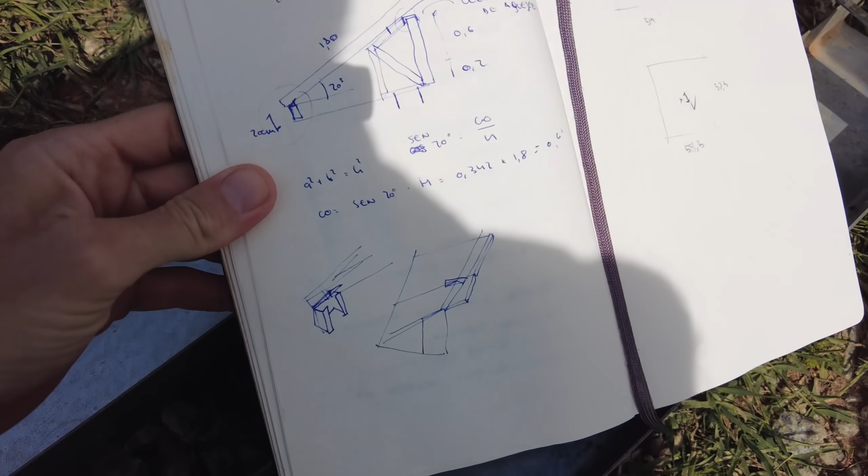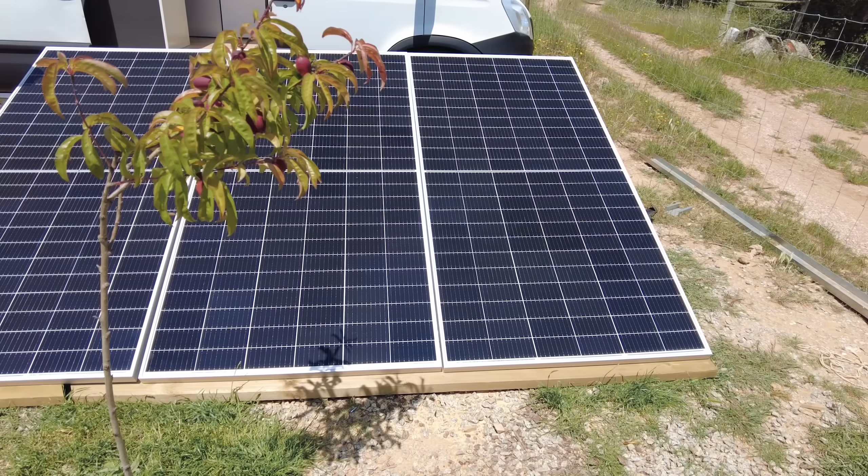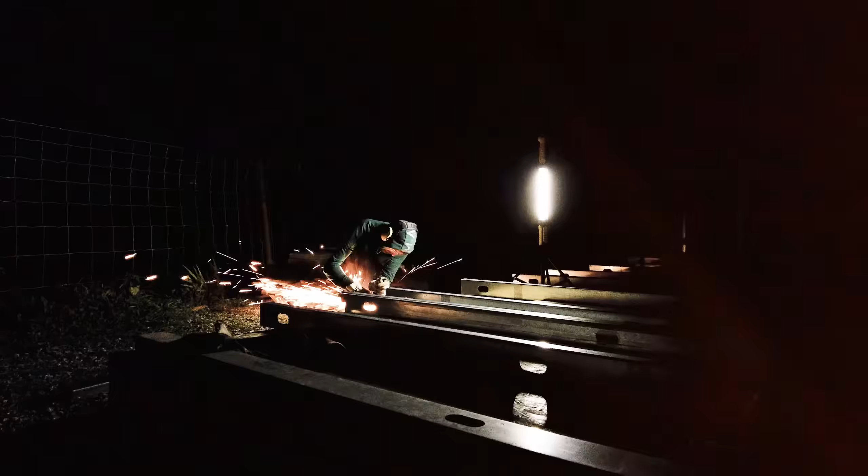I'm Eugenia, and this is Pepe, Aspen, and Lolita. We are an architect and a designer that moved to the countryside to self-build our new home. After traveling for a year in our self-converted camper van, we decided to settle in, looking to live a simpler life, grow our own organic food, and build our house.

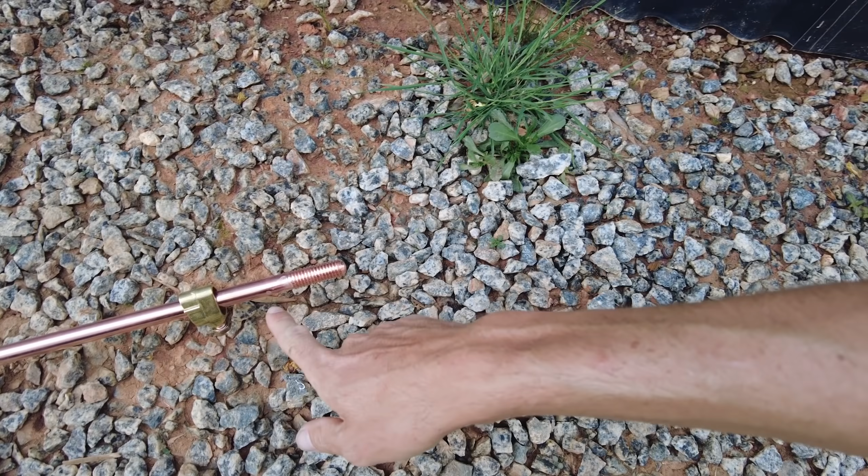I think I'm gonna go over this section. I'm gonna pick this area here in this corner and make a hole. I'm gonna go for the hammer, a shovel to take some of the gravel off, and that's it.

One of the sides actually has a pointy finish, and that's the one you're supposed to put first. It's gonna be complicated, I think, because it's supposed to have a machine to do it, so we're just gonna hammer it. I've seen many people doing it like that on YouTube, and it doesn't look like it's impossible.

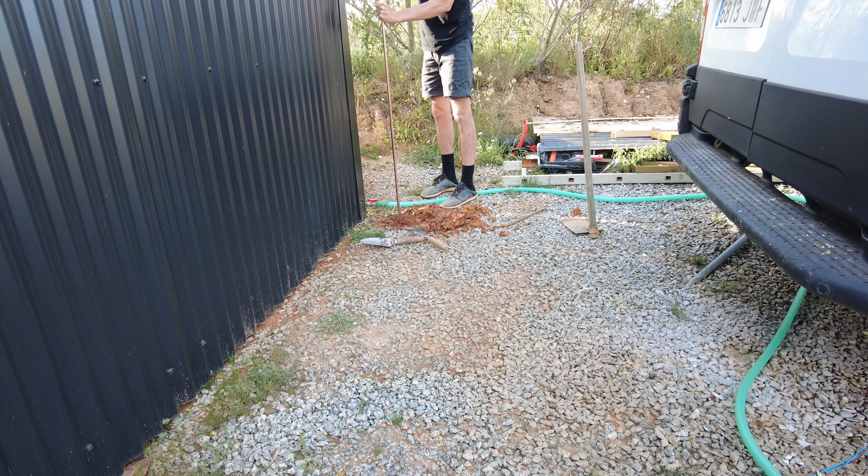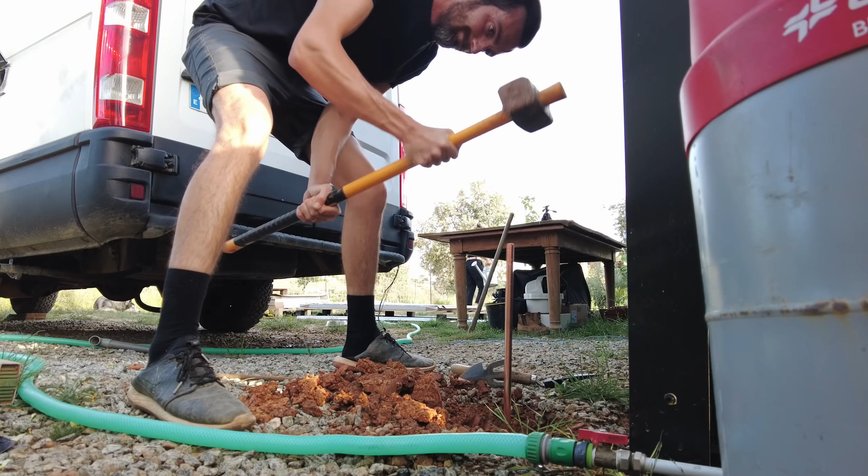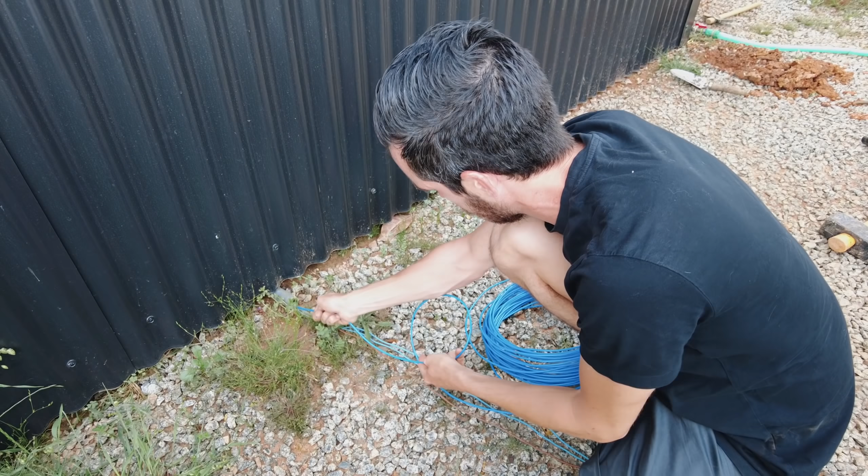So here it is, finally in. Took a bit more brute force than I expected. Here is missing a box that we will put later on because I couldn't find it. I just pulled these temporary cables a little bit in, attached the one that we want to take out, the ground one, to this cable, and hopefully now if I pull it, the whole thing will come off.

Check there. The solar kit installation was a bit complex, but luckily the kit that we got came with some plans that Pepe was able to study and go through before starting all the installation. He also has experience from when we built the van. This installation, of course, was at a bigger scale. Although at the end of the day he said that it wasn't much different. You just needed to know the basic concepts and it was pretty straightforward.

The electrical cable will come over here and inside the house through this little pipe that we need to close, of course, once everything is finished, because these cables are temporary.

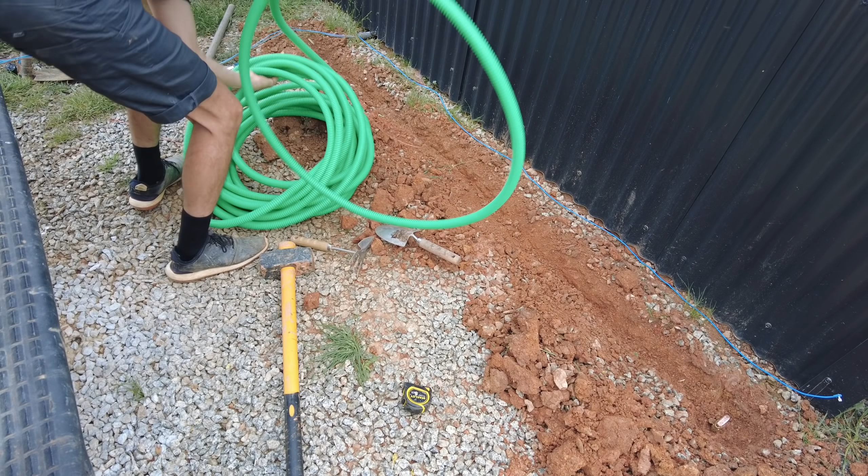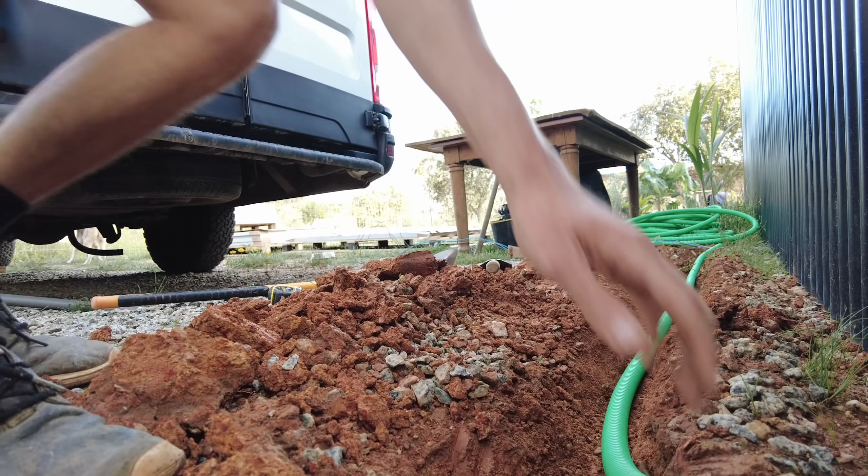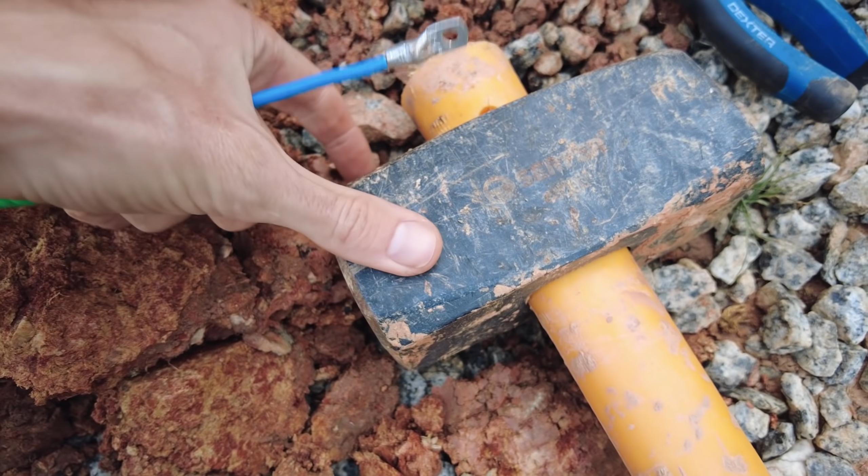There is a tool to put these terminals on properly, but I don't have it. I ordered it and it didn't arrive yet. So what I have done in the van, I just put a hammer or a piece of rock or concrete or something solid at the bottom, and then I just hammer it.

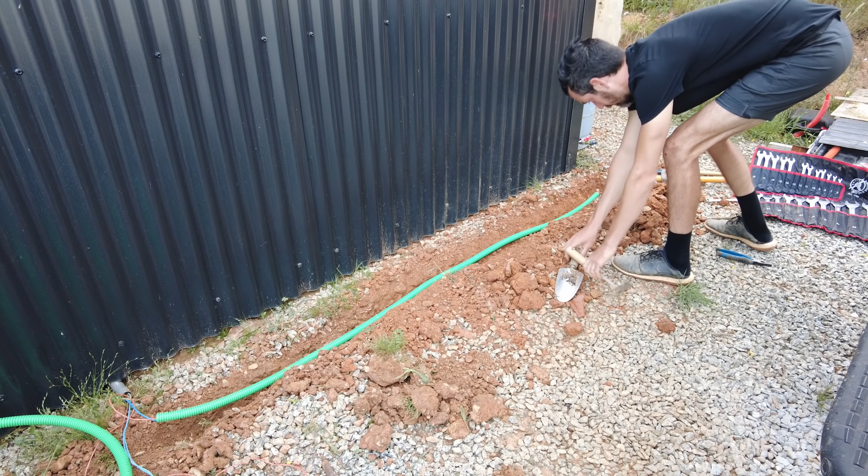We decided to go off-grid for many reasons, but the main one was to avoid being attached to monthly bills. At some point, when we were renting places, we had to pay bills of 200 euros per month and experienced increases in prices even though we still consumed the same. So after detaching ourselves from all of that while living in the camper van, we didn't want to go back to the same situation.

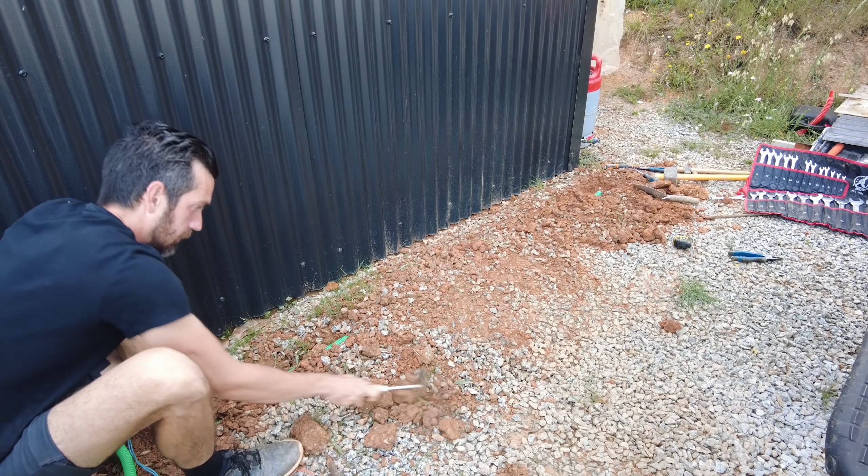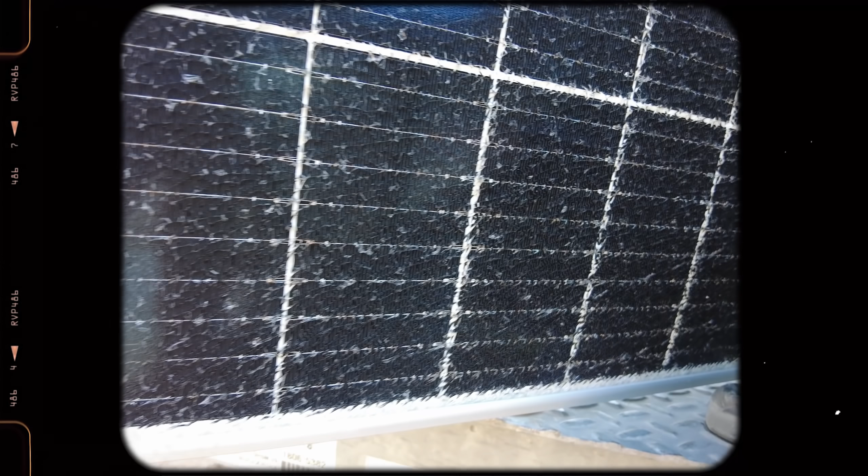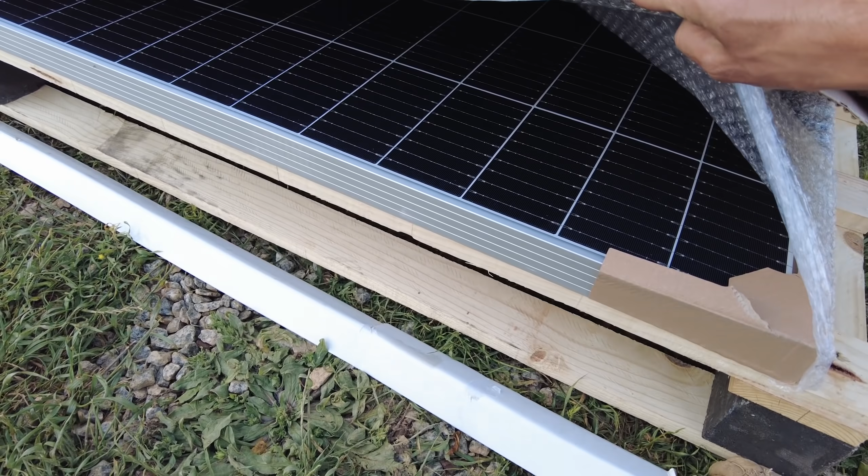We were missing one of the solar panels, and you may remember from last week's episode that one of them arrived broken, but luckily that same day we also got the replacement. By the way, we received the fifth solar panel in a couple of days only. The company just shipped this replacement to us, of course at no cost because it was a shipping issue. And tomorrow I'm gonna be starting the temporary structure for the panels.

Lolita loves a box, so we have left this box here for her for a while.

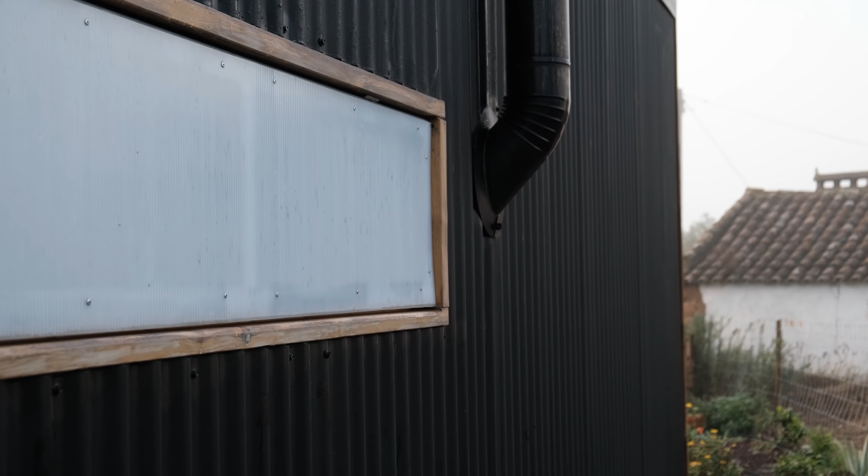At this point, we found ourselves in conflict because the original idea was to build a greenhouse that would hold the solar panels on top, giving us the extra space that we needed for storage, the laundry room, and also the option to grow our food during the winter. But we could no longer live without electricity, so we decided to install the solar panels on the ground.

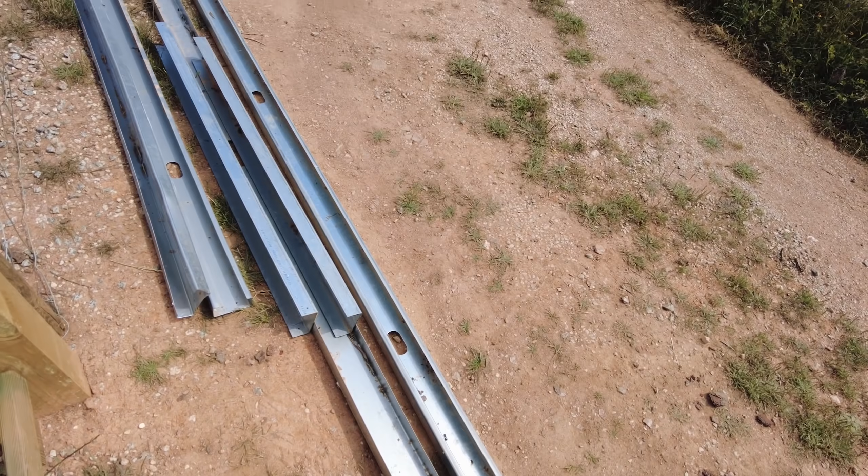Good morning, guys. Today is finally the day that we start installing the solar panels. Hopefully I can have it done by today. Not sure if I'm gonna be able to, but I'm gonna try. So our 5 panels of 410 watts each. For now we're gonna be building a temporary structure just to have the panels sitting here off the floor and tilted 20 degrees. We actually have some leftover material from the build. This is all the steel that was left. Not much steel, but it's gonna be enough to build this temporary structure.

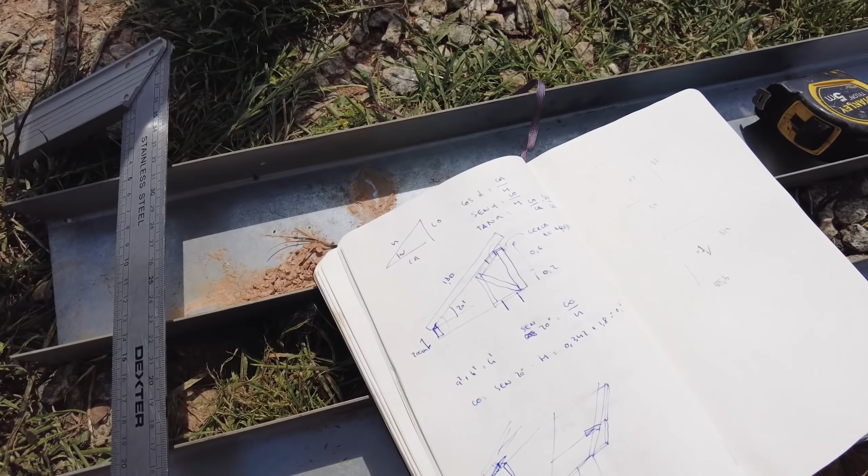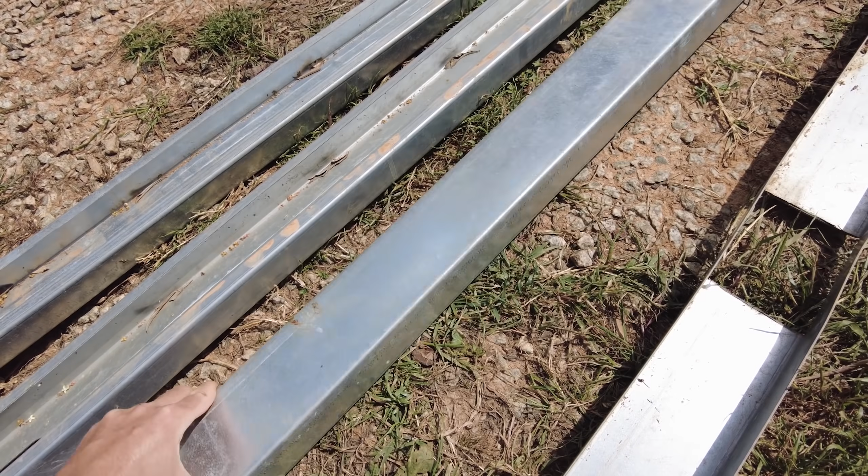What we plan on doing is basically 2 side walls. I don't know if I'm gonna do a middle one, but for now with the material that we have, I think we're gonna be able to do 2 side walls like this. They're gonna be tilted 20 degrees, probably like 80 centimeters tall in this position. They're gonna be connected with a long joist, which is this one. The joist is gonna be tilted like this 20 degrees, and the top part of the panels are gonna be screwed to this beam, raising the panel from the floor 20 centimeters.

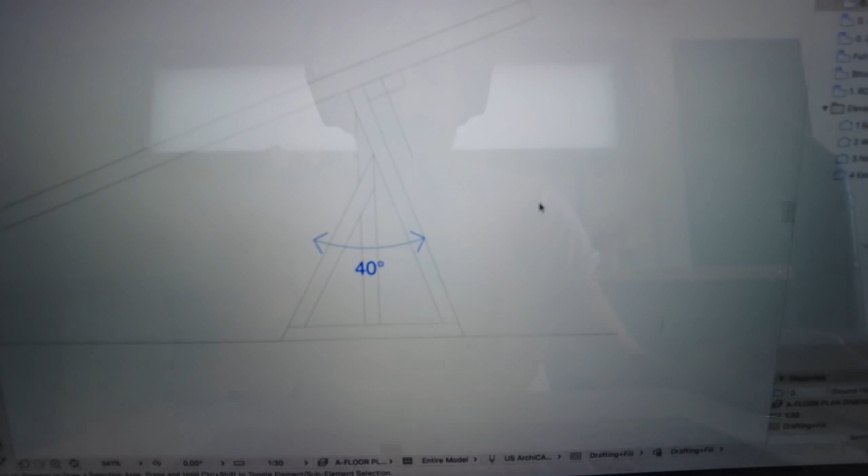Alright, change of plans. No way I can figure this out with the material that we have in order to make it stable. So I'm gonna just design it in the computer and then do whatever dimensions the computer says. Alright, so we already have what we're doing. It's basically a structure like this, like a triangle shape that will be sticking out like this. Then the beam is going to be attached to this structure on this side.

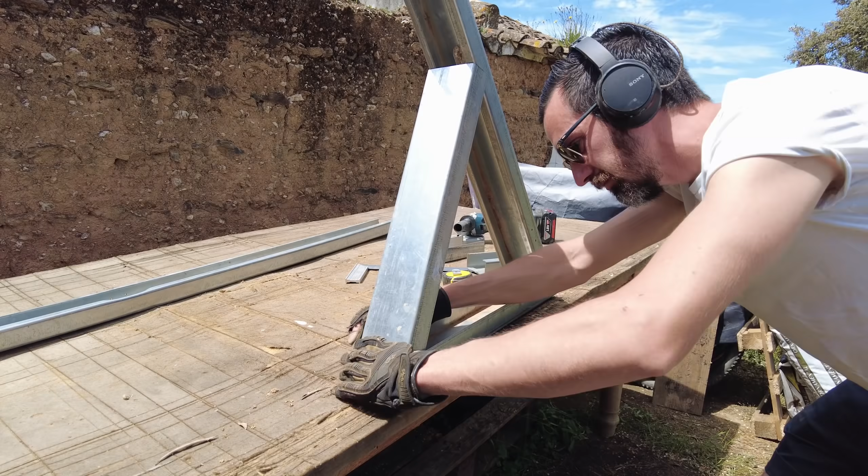So at this point, we are uncertain if we are going to build the greenhouse or not. There are many pros and cons, and the main con is that we really want to start the construction of the next house. If we build the greenhouse, it will delay all of that for at least a couple of months.

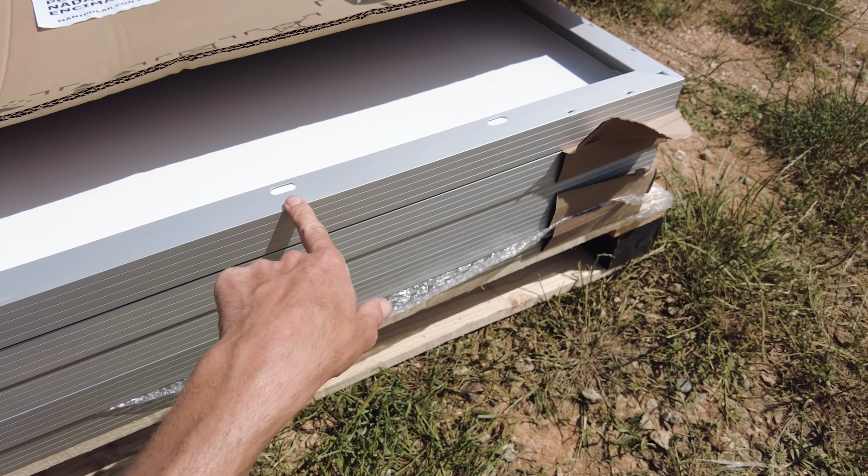The beam is gonna be sitting, I'm not too sure if over here or over there, we'll see, but for now let's say it's gonna be over here with these holes. And we already bought the bolts and the nuts and the washers for this. We bought them yesterday, they're here.

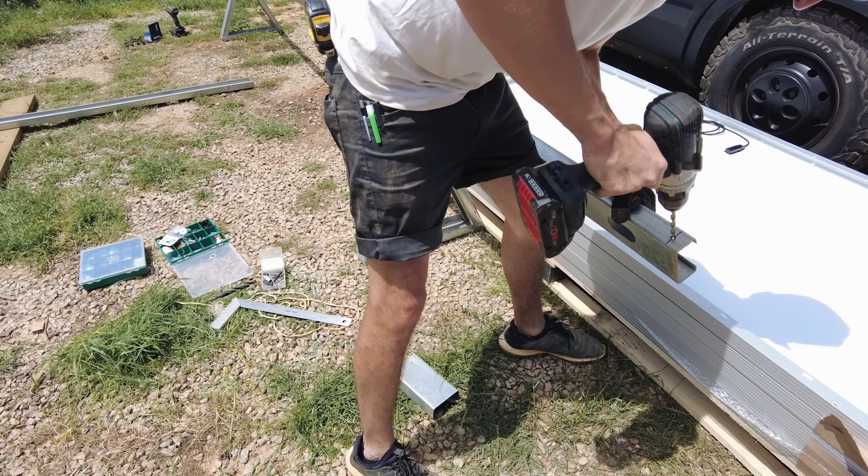Temporarily, we installed the solar panels facing directly to the south with an inclination of 25 degrees, knowing that we will increase that inclination in the final structure for the winter time. We're gonna put the first one just to test the system out. Hopefully it works.

Being honest with you guys, when we first moved to the property, we decided that we wanted to build in this part of the land everything that we needed to live comfortably for the next years. The warehouse will of course help us in many ways because it will make our lives easier, like having a laundry room, for example, and extra storage during the winter time and summer, etc.

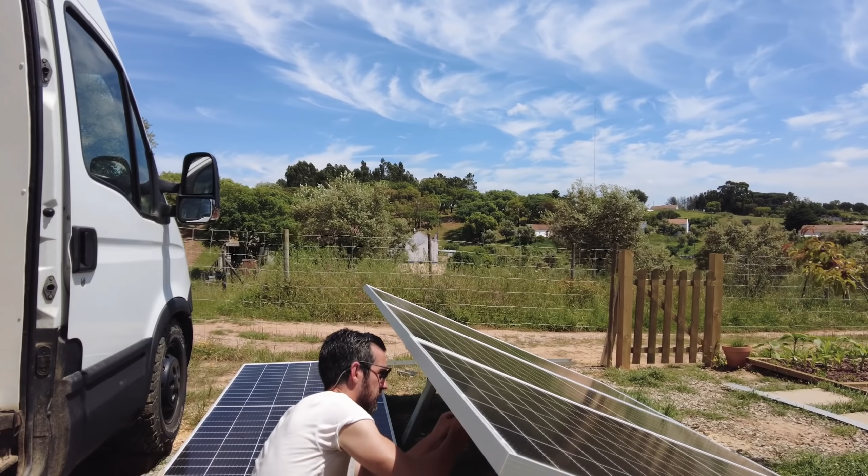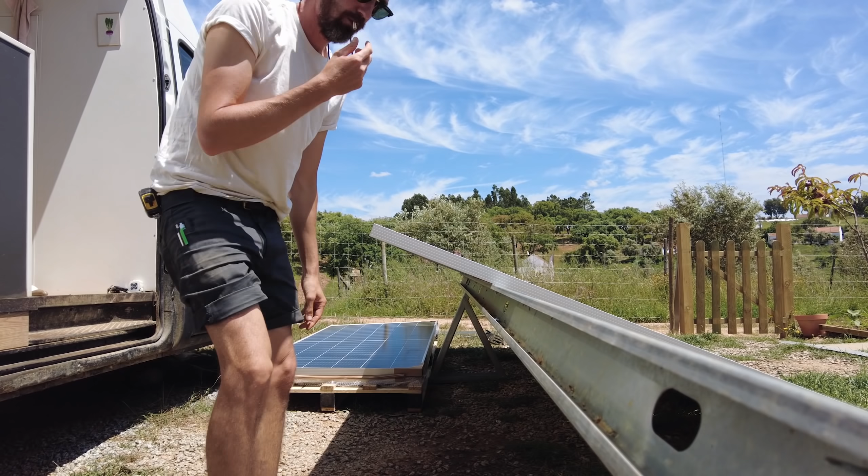For securing the solar panel to the structure, we are using an M8 bolt and then a pressure washer and just an M8 nut.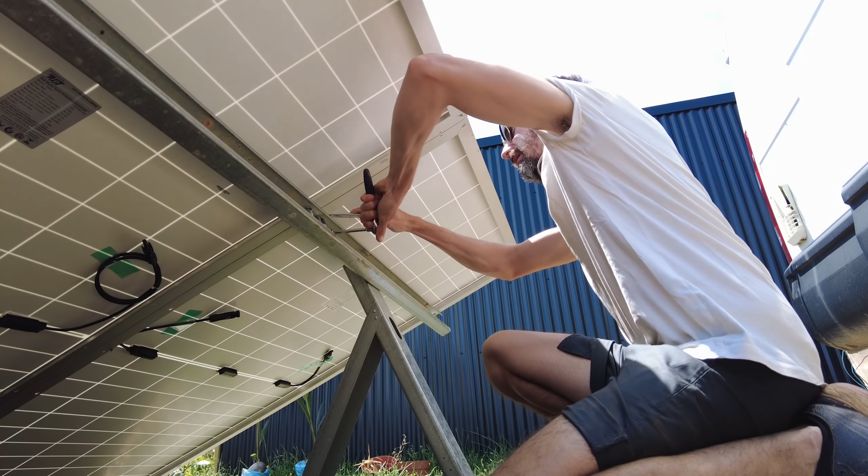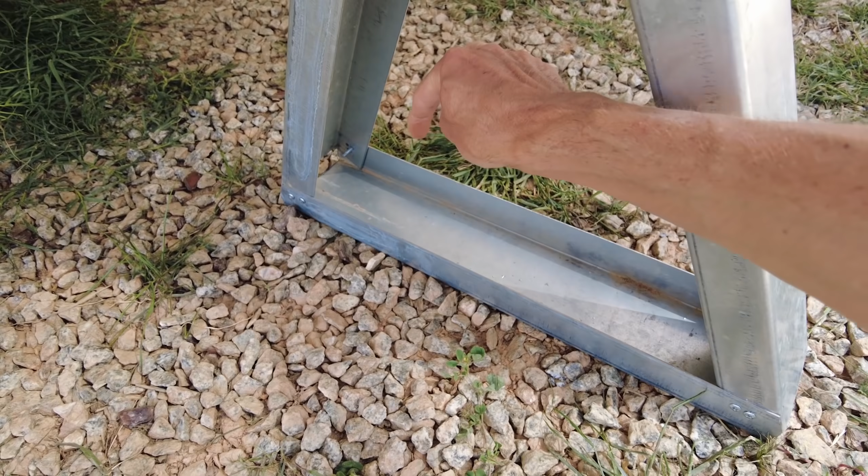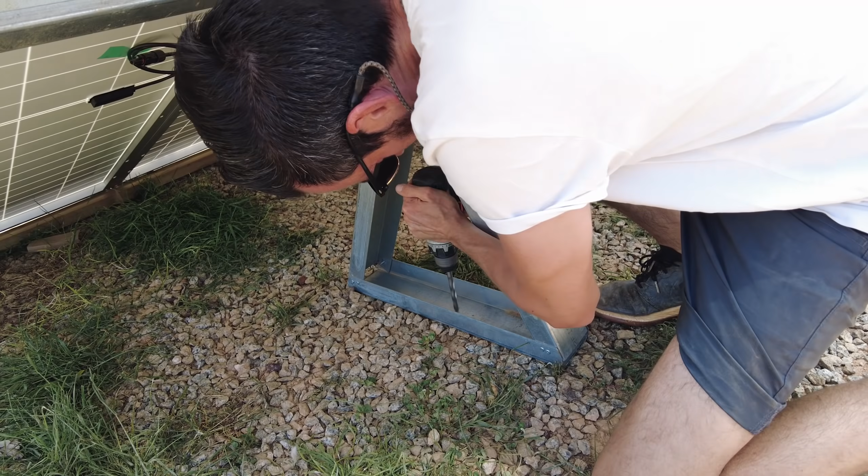The panels are in place. It's a very sturdy structure. I'm gonna cut a couple of rebars and then drill a hole here. That way we make sure that it doesn't move in case the winds come. But I don't expect this to move anytime soon because it's super sturdy. There's no way this will go anywhere.

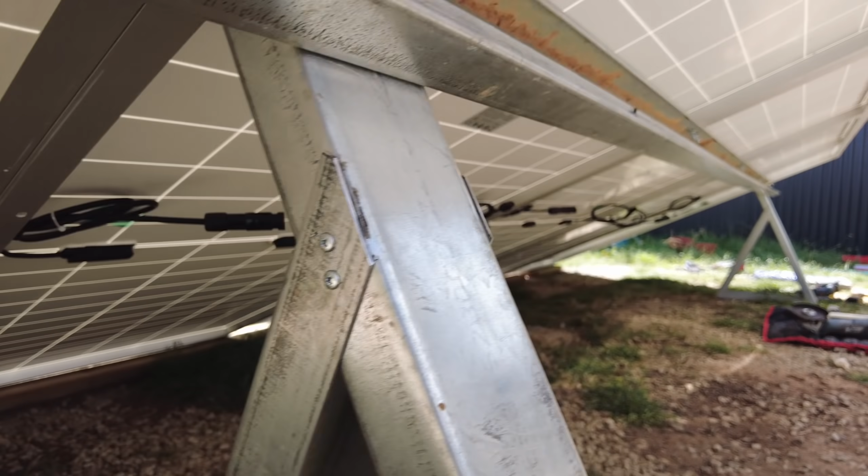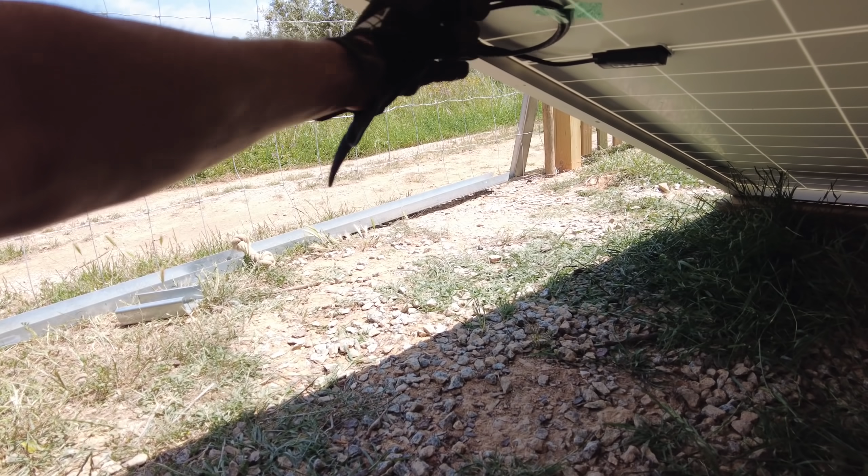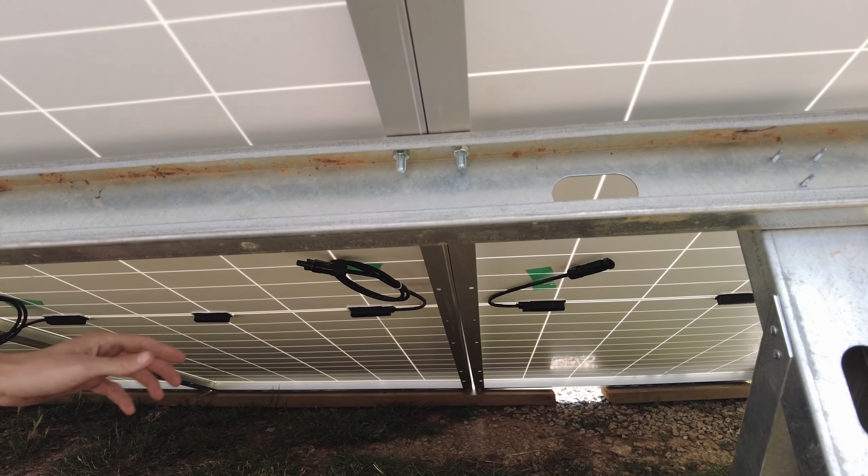Now I need to connect all the positives to all the negatives from 1, 2, 3, 4 connections, and then the first one, the negative, will go to the negative of the solar regulator, the cable that comes from the house, and then that positive over there will come also from the house. So I'm just gonna start connecting the panels in between them. This is the last one. I will do the same, connect the positive to the negative.

All the solar panels are connected in series right now. 1, 2, 3, 4 connections. So everything is connected to each other. And now I have, as I said, one positive over there and one negative over there, waiting for me to bring the cable from the house.

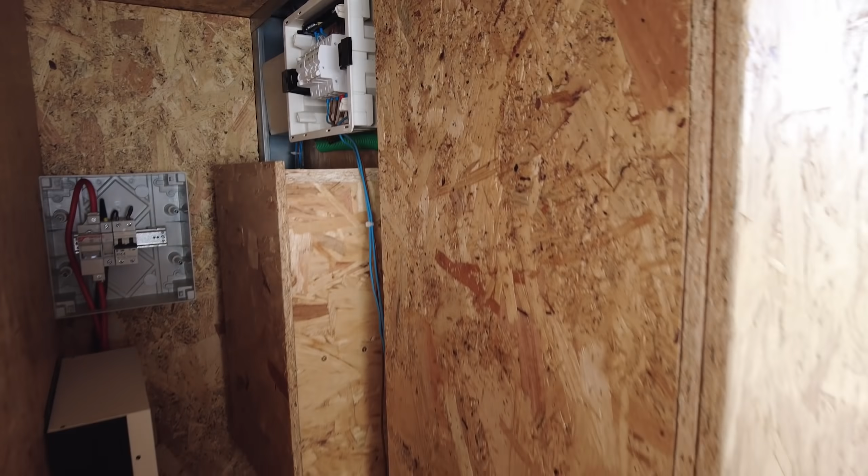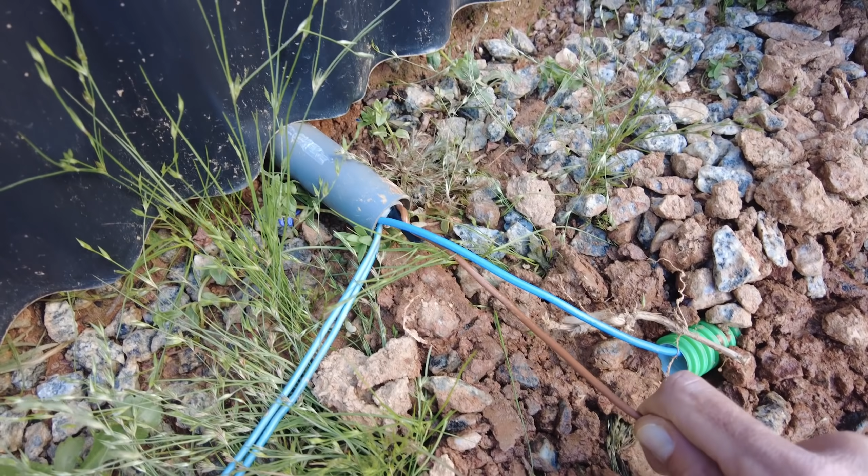Alright, things are moving fast here in the electrical installation. I already disconnected the cables from the van. This is the solar cable. It's just one color, black, for the positive and the negative, so I need to be very careful labeling in green the negative, and it will remain black for the positive. This cable is connected with these 2 connectors. These rapid connections came with the instructions, so it's pretty good. Actually, this is gonna be the positive, it's gonna be the first cable that goes there.

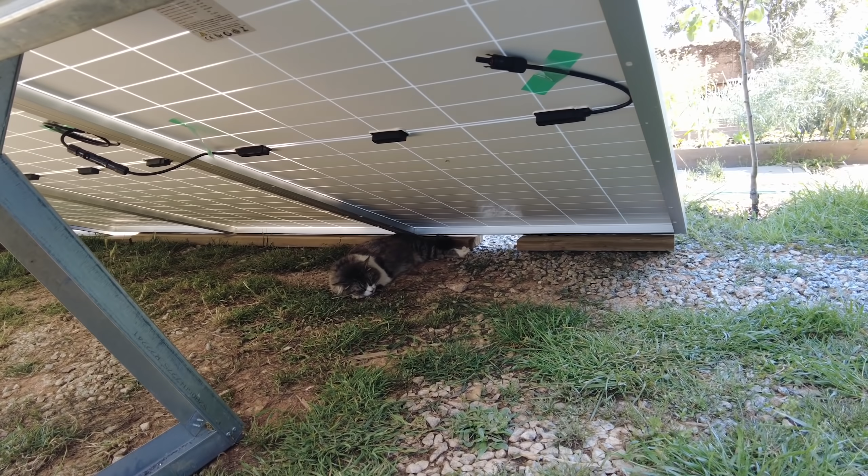Oh, Lolita found a place, and Aspen found his place as well. Oh man, so happy I made something for them. This is for you guys.

Everything here is connected, but this communication cable that I'm gonna connect now. Turn this thing on. Are you guys as excited as I am? Because I am super excited. Eugenia is not here actually, so it's gonna be a little of a surprise when she comes and sees everything running.

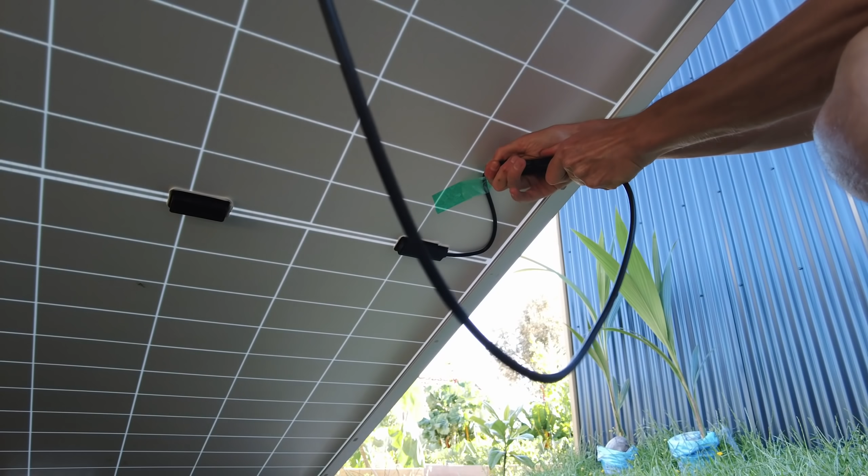I'm gonna connect this second cable. Solar panels are connected, so now I'm gonna put my shoes on just in case. The fuse for the battery, and once I put the fuse for the battery it will be connected to the inverter.

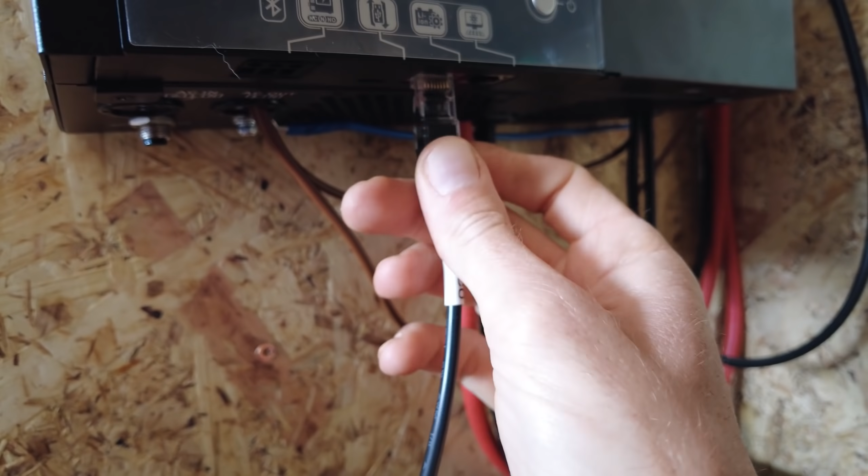The solar system installation was a big investment. We ended up paying around 4,000 euros. But when we did the math of connecting to the grid and calculated the payback time, in a year and a half, 2 years, we will have free electricity.

At the beginning of the summer, we planted this corn from some organic seeds that we got in our local market, with squashes and beans. The reason is because the summers here are really hot, so the squash plants help the soil keep moisture because they cover all the soil, and the corn plants need a lot of nitrogen from the soil, so the beans help the corn fixate that nitrogen, and the corn helps the beans climb. So it was the perfect combination and it worked pretty well.